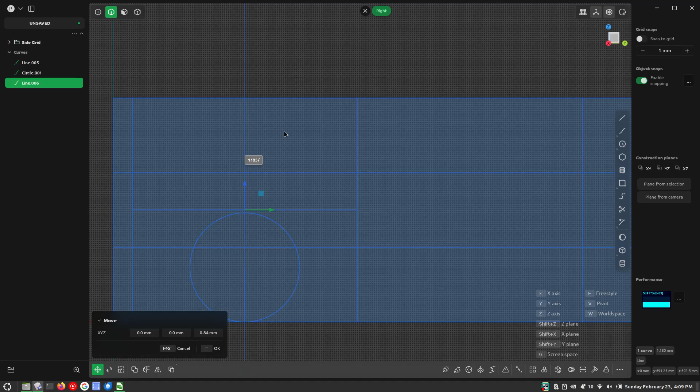Now we have a wheel, and then we can use that wheel as sort of a basis for the wheel flat we want to make. So there's mid. Let's move that up. G, Z, 1185 again, divided by, let's go 24. Okay.

And you can do this however you want. So then let's hit offset, F, and yeah, this looks like it'll be good. So the inside of the wheel flat will be here, and then the outside will be there. So let's strike a couple of lines accordingly.

So we've got 1, 2, and you'll see in a second what we're doing with these lines here. We can even get rid of one of them. So we just have that second one. So this one will offset F to, do we want to go in that far? How far is that? No, let's go out here. Let's make a really thin wheel flat. How about that? Okay.

Oh, I forgot to do one thing. Let's also copy this, Z, and then I'm going to just keep using that same number and essentially make everything related to that height number that I'm using. And you can do the same thing if you happen to have a different height. All right, so that's what I've done.

And now I want this wheel flat. It can't tuck in too far, right? It's got to kind of come out at the sides. And I like to go with, say, like a 12-degree option. So let's go 102, right? Because 90 plus 12 is 102. If I had gone the other way, then I would just be doing 12 anyway. So 102, same thing on both sides.

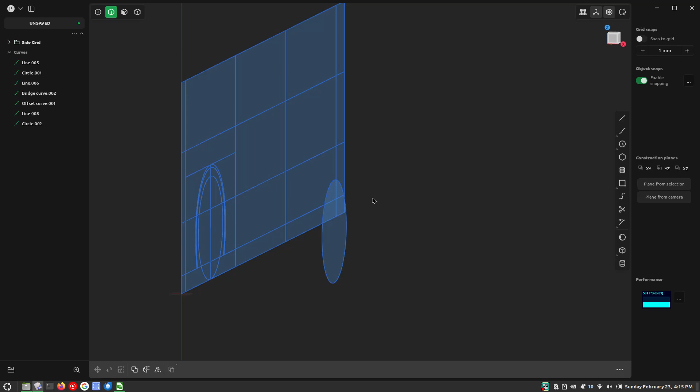So let's go Shift D so that we can retain that circle on the grid as well as copy it out into 3D space. So let's go X, and then half of 1410 is 705. And obviously, if you don't feel like doing math, you can always just go 1410 divided by 2. Helps if you type all of the numbers. 1410 divided by 2. There you go. Okay. And now, oh, sorry, I like perspective. There we go. So tap 5 on your number pad.

Okay, 3. So I can grab the face, and I'm going to extrude it out. Negative 245 over 2, right? Because it's going half one way and then half the other way. So 245 divided by 2, back that way. And there we go. Now we've got a 245 section tire in the correct space. Now, obviously, things are approximate. Some tires are narrower, wider. The diameter could be different. But using a tire size calculator, this is what you're going to get.

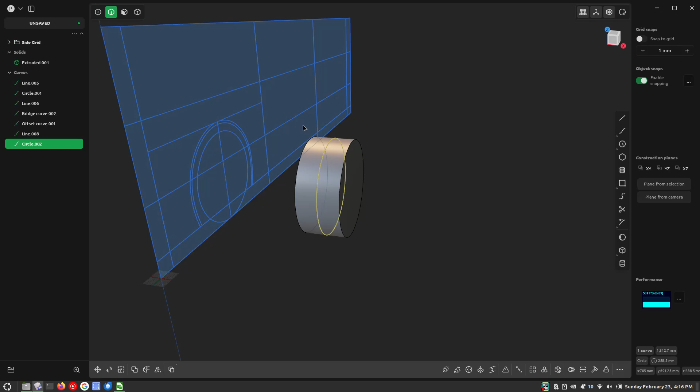Oh, sorry, and then that's assuming stock wheel offset. However, if you put a 245 on a 9-inch wheel, you're going to need to push that tire out 10 millimeters. If it's on a 9.5 with an offset of 29 millimeters, then you got to go for 16 and so on. This used to be like the widest available option for NA Miatas. I know Goodwin Racing recently started selling the 9.5-inch wide wheels for Konig. I forget if it's the Hypergrams or the Ultragrams or the Decagram. It's one of those in a 9.5-inch width.

And then the 10s and 11s are available now. And it used to only be those Hoosier A7 and R7s in a 275 or even a 295 if you wanted. I know now there's the Nankang CRS available as a 200 treadwear tire in a 275. So use these modifiers if that's what you want to do. You know what, let's account for that. If we wanted to do a 15 by 10 for track days, let's go 16 on this 245 and see what that gets us.

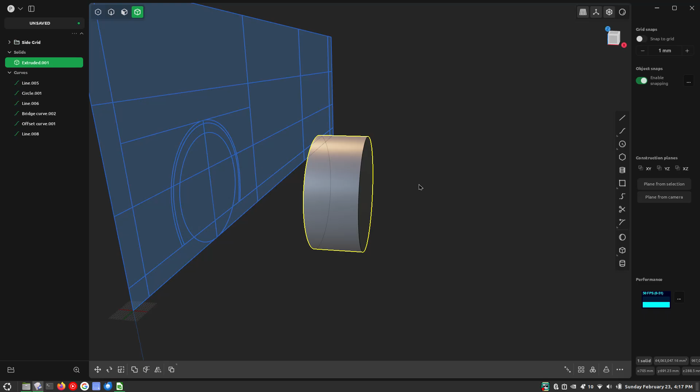Oh, what did I say for the 16? Sorry, I said it backwards. It's a 9.5. So 16, we're moving it out 16 millimeters. So G, oops, let's go 1. G, X, and then 16. All right, so that's where it would sit if it was on a 9.5-inch rim. And then here we can go Shift D. So we're copying that now. Let's actually rename the original. So we'll go 245 on 15 by 9.5. That's what that is. And now this one, let's hide it.

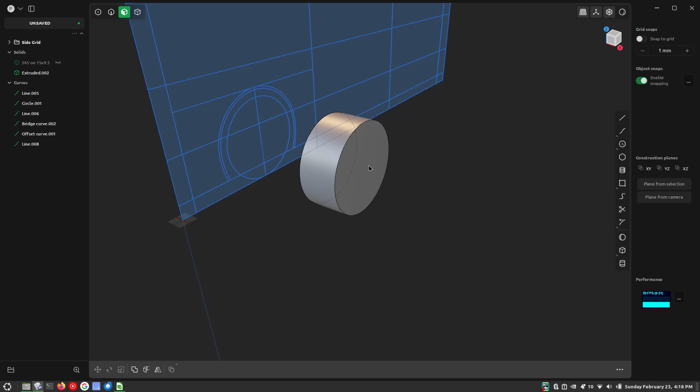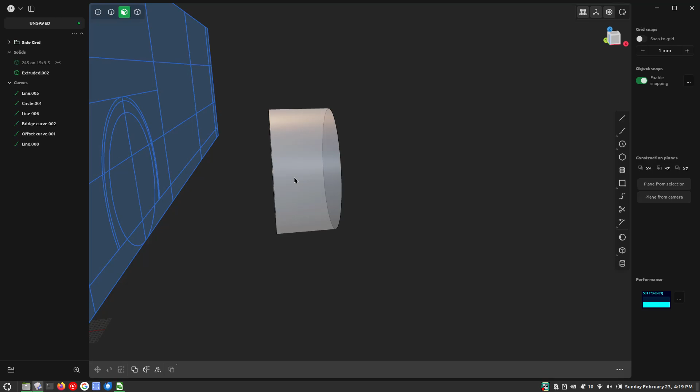Now let's select the faces. So if it's a 275, if we just add 15 to each face, then we go from 45 to 75, right? So 15. There we go. So that's a 275. And then what was the difference if we went to a 275 on a 15 by 10? That's only a 4 millimeter difference. So let's push that out by 4 mil. G. Oh, helps if you select it, right? Okay, there we go. G, X, 4. All right. So that's where a 275 would sit.

Now, obviously, 275 35 R15 is going to be actually slightly smaller in terms of diameter, but let's just leave it. It's better to make the objects that you have to work around slightly larger to make sure you have clearance. So let's go for that. 275 on a 15 by 10. Cool.

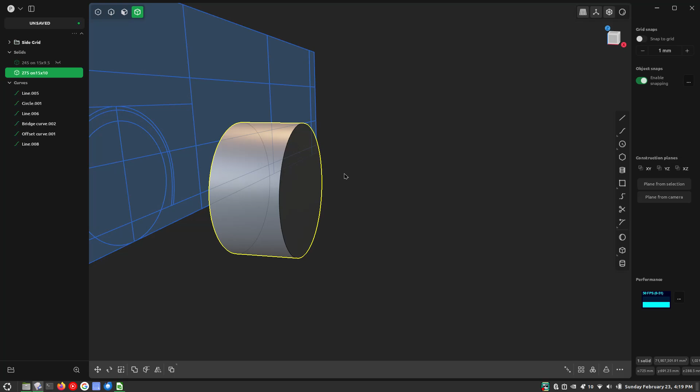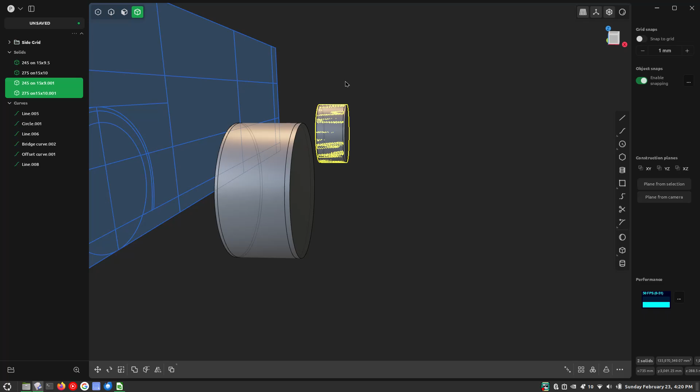We've got a front tire set and a rear tire set. Let's say your street tires and your track tires, right? Okay, so let's start with the wider ones because we want to make sure that our fender's clear, right? Okay, so coming back to this line, let's grab that one.

And I'll just use a ratio again. So I don't know if you remember, I mentioned the total length was at 3,555. So I'm going to hit G, X, 3,555 divided by 4. So now the width of the vehicle, the total vehicle width is half the length. Obviously, I know I added on a little extra, but I like to use that sort of basis. Okay, and that's good. We see that this line is outside of the outside edge of the tires.

All right, so let's grab this bottom point, G, X. Let's move it in, probably just a little bit. And again, you'll see I'm typing and I'm just making everything a ratio, sort of a function of that basic dimension. All right, so divided by 48, see what that gives us. And you'll also notice I'm kind of going by multiples of, I don't know, 3 or 12 or whatever. So I'll do like 12, 24, 48, 96, and so on. So that's kind of a nice tuck. I think, yeah, let's go 48, and then we'll tuck it again after we project our curves. You'll see what I mean in a second.

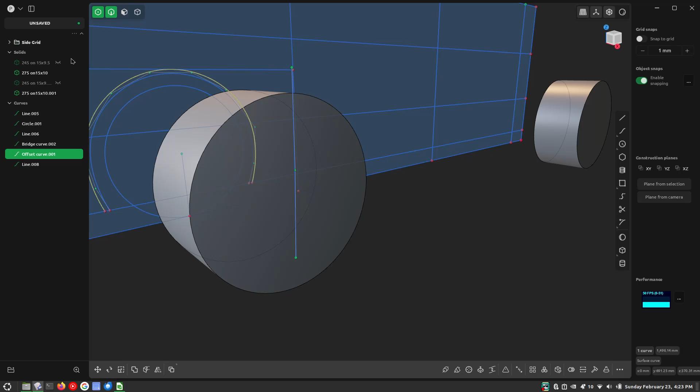Now, when we project these curves, since this point is at the exact same height as the top of this curve, it'll essentially split that curve into two curves where this point is. So what we want to do is grab this curve and then extend it. I have that hotkeyed to Shift E. If I remember off the top of my head, that is not automatically hotkeyed. And then you can put anything you want here. You can go 5 millimeters, half a millimeter, 500 millimeters. Let's just go 50. How about that?

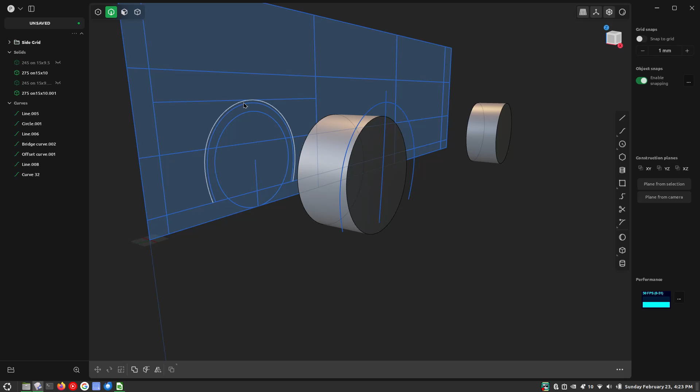All right. So now we'll grab this curve and this curve, project. I've got that hotkeyed to I. I think that's a default hotkey. Somebody can correct me. Sorry, I've set my stuff up such a long time ago that I don't exactly remember what was default and what was something that I hotkeyed because I was using it.

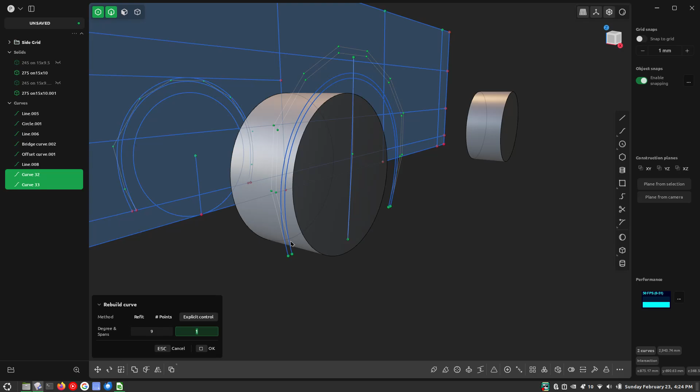Let's keep this line for now. I'm not going to delete it. I'm not going to hide it yet. But these curves both need to be rebuilt. So let's rebuild them. Number of points. Let's stick with this 10. Or actually, no, explicit control. Let's go with 9. And then, okay. And now, if we grab both of these and we use the square tool, you'll see that there's deviation. Let's amplify that deviation. Problematic.

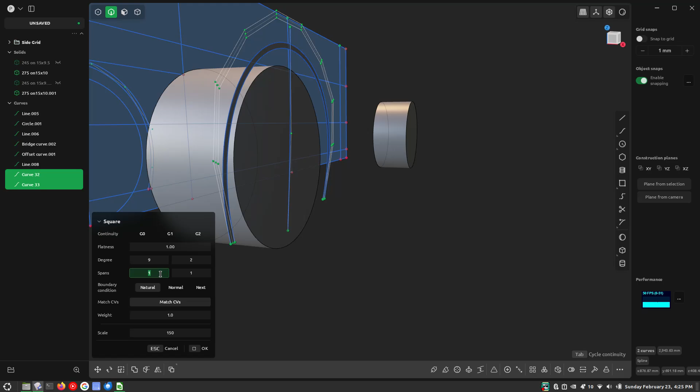Well, that's because we're trying to do a 5 by 5 square onto essentially what should be a 9 by 2. So let's go for that. 9 by 2. Because we don't need all those points in the middle. And sure enough, we see 0 deviation because it's able to match those points exactly. Yeah, I guess since I said this is kind of more for beginners, oops, I accidentally got rid of it. Let's do it all over again.

You don't want to increase spans if you can avoid it. Also, we typically only do like a 3 by 3, a 3 by 5, a 5 by 5 square. Once in a while, we'll cheat and do like a 7 degree square, but for the most part, we're going to stick with 3 by 3s for most of our primary surfaces. This is kind of the exception. Wheel flats, just because there's so much curvature here to match, we get a 9 by 2. It's a bit of the outlier.

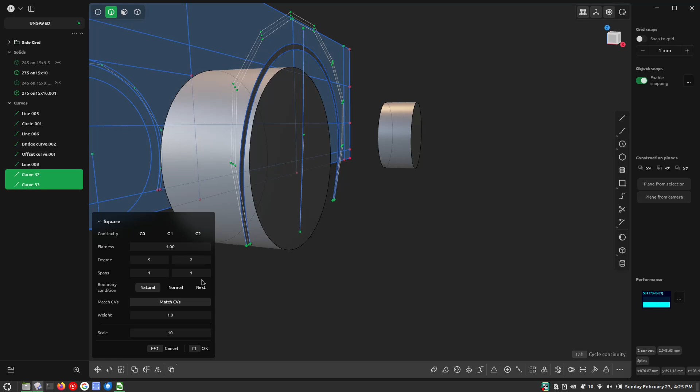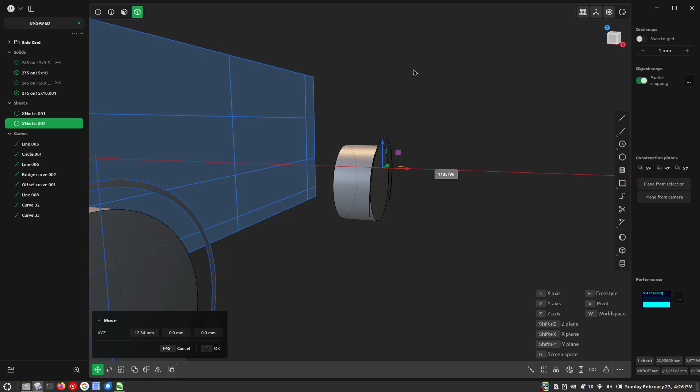Okay, now we want to take this exact same wheel flat, and we'll just copy it to the rear. So Shift D, and then Y 2370, and then we'll actually just move it out. So G, X, and divided by, I think 96 gives us 12.34. And so what did we say? That it's 10 millimeters wider in the rear. So that's perfect. We get 12 rather than 10, but for my OCD, we keep that ratio going. Okay.

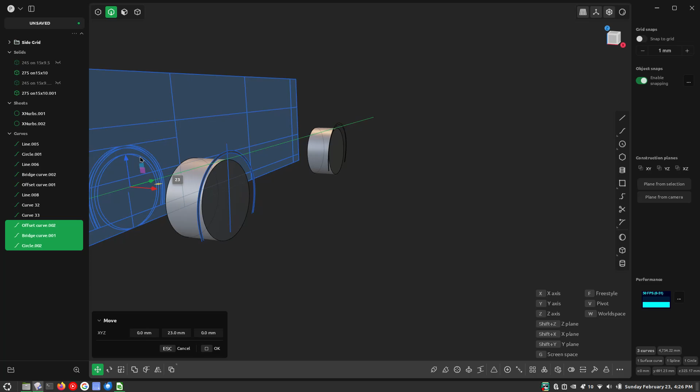That's it. That's actually our initial setup. We've got a wheel. We've got wheel flats. We can copy this profile. Let's go Shift D, Y 23. All right, and then we'll stop here and we'll pick it up in the next one, and we'll start drawing our basic side profile.